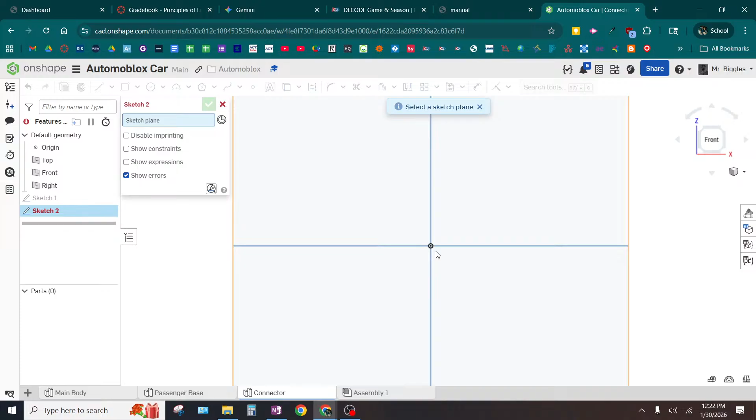So yesterday I was showing how to make the base of this, and I did it a variety of different ways. I'm going to do it one kind of quote-unquote final way. I'm going to do 3 center point rectangles. So that's kind of my middle one. And then I'm going to do a right side over here.

When I place the center of it, I'm going to have it aligned to the origin. Notice there's a horizontal constraint likely being applied. And I'm going to go in. I'm going to touch this. I'm not clicking, I'm touching it. And then as I go up, see how it's automatically constrained? I'm going to show that again. I'm placing the center here.

Notice as soon as I move my cursor there, you can see that orange dotted line connecting it, and the horizontal constraint is automatically being applied to lock it in line with the origin. But then when I do the second click, if I just immediately go up here, notice there's no snap to automatically apply a constraint to line this up with the rectangle. But if I touch this, I'm not clicking, I just touch it with my cursor and then go up, now there's a snap to constraint.

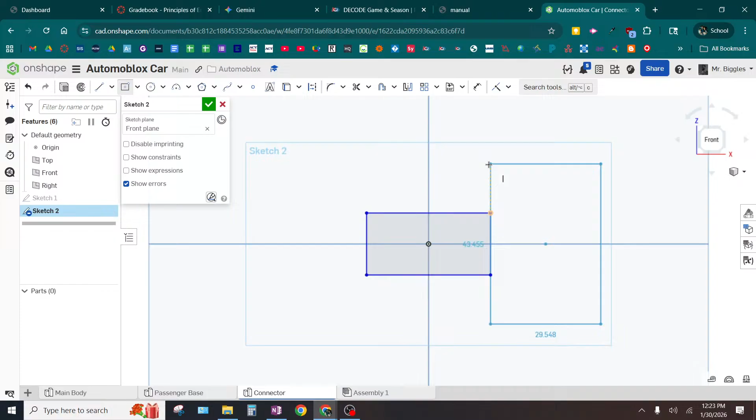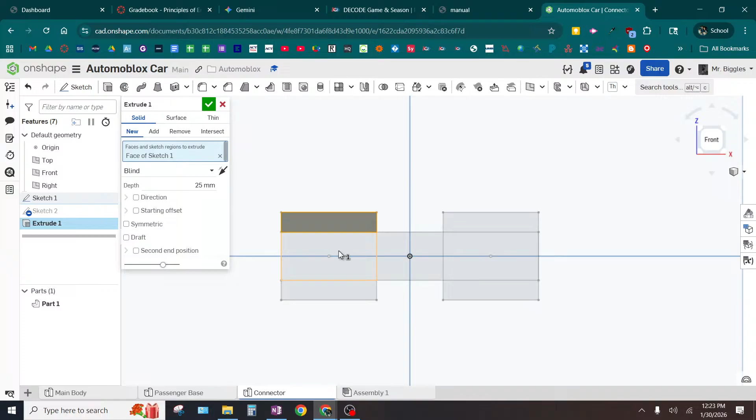Okay? Very, very useful. I'm going to do the same thing over here. Touch, then go up. Okay? What I like about this sketch as opposed to this one is that this one has things overlapping. So if I ever try to extrude with that sketch, I'd have to click on each of these individually, which is really, really annoying. Okay? That's kind of the downside of having that overlap.

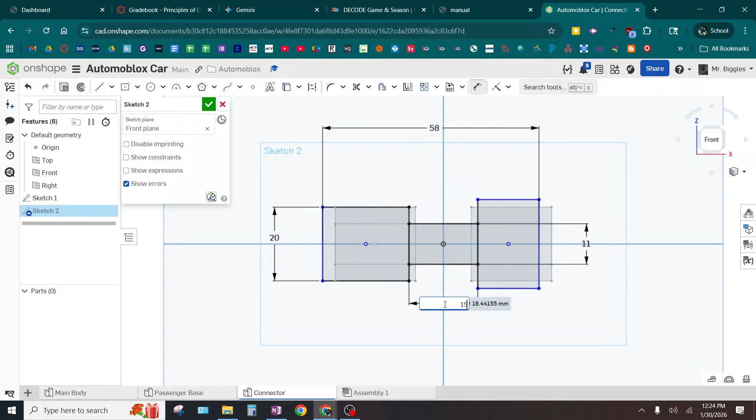On the other hand, 58, 20, 15, 11. Okay. On the other hand, these, I would only have to do 3 clicks instead of 5 because there's no overlap. Okay. I'm going to dimension this now. I believe we had 58, 20, 11, 15, and then I just got to do some equal constraints that I haven't done yet.

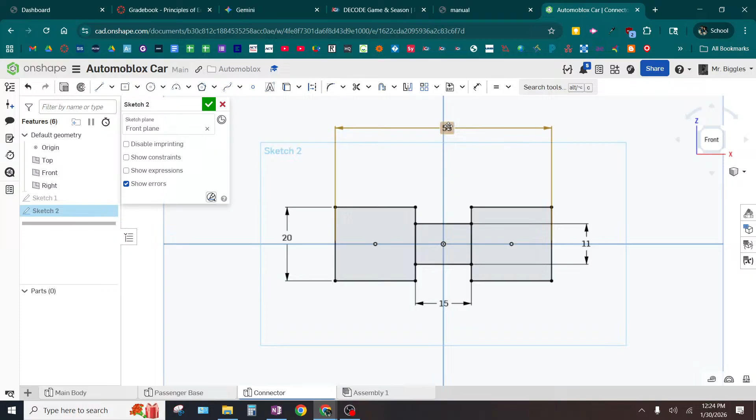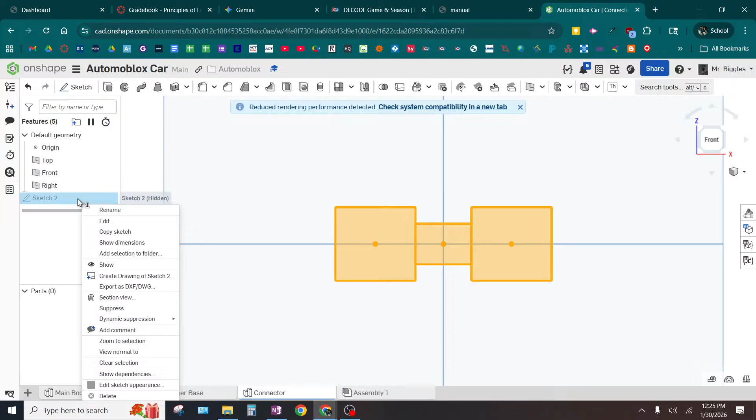So I'll make this equal to this one in size, height equal to this one, and it's all black. So this is, in my opinion, the best way to do it. I think it strikes a compromise between doing it with all lines and doing it with the rectangles the way I did before. You don't have overlap. You'll only have to do 3 clicks to select them. I think this is the best way to do it. So I'm going to actually delete my first sketch. And I'm going to rename this one the bottom section.

I am not done with it, but I kind of wanted to go over 3 different ways of making that same thing, pros and cons of each. You'll notice looking at it that there's rounded corners, fillets. We see those, yes? And if you look very astutely, the ones on the outside are larger than the ones on the inside. By outside, I'm referring to like this one. Does seem to be a little bit larger than the ones on the inside. By inside, I mean these. Okay? So I'm going to do 2 sets of 4 here.

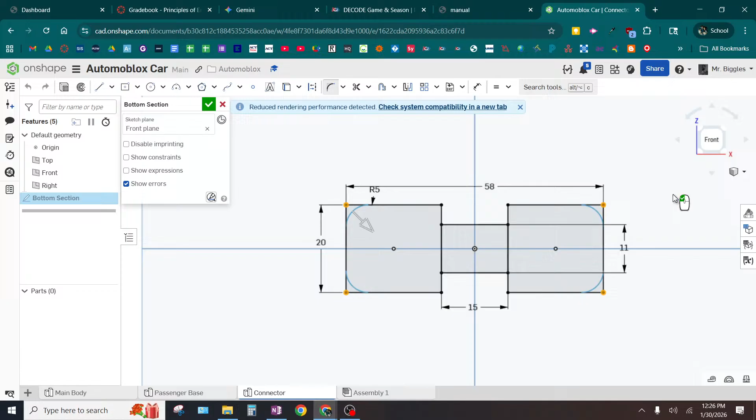Outer one. Maybe 5. Somewhere around 5 millimeters. So I'm going to do a fillet. Click. Click. Click. Click. I'm done clicking to select. I do one final click off to tell the computer that those are 5. Now you might notice, I'm going to undo that. Everything is black, which means it's fully constrained.

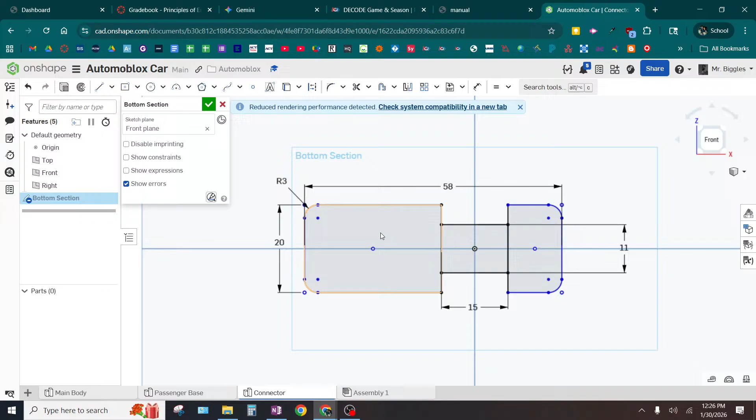But then the moment I add those fillets, now it suddenly is blue. It's almost like interfering with those corners. Yeah. Causes some issues. We see that? Yes? So you do. But I have found a lot of times that it is easier to do fillets as a feature than it is to do them in the sketch. However, that does introduce more things in your table of contents over here on the left side.

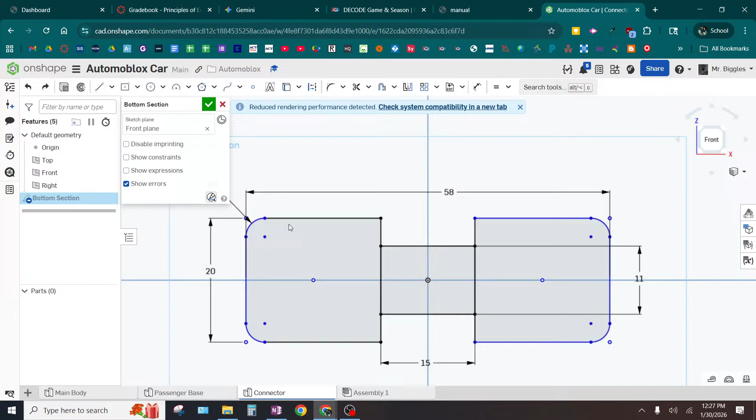One of the issues with sketch fillets is exactly what just happened here. You do equal constraints or dimensions, and it starts to break down after you apply the fillets.

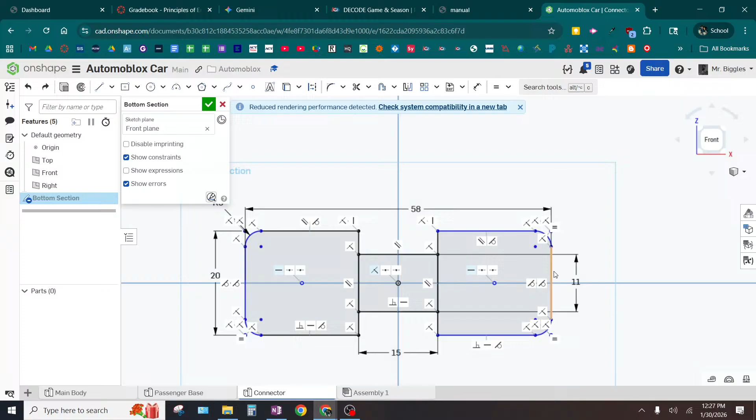You'll notice that my equal constraint is no longer there. I made this equal to this, and this equal to this. And that's because I equalized lines that no longer exist. They've been broken up by those fillets. So my recommendation is to not do the fillets in the sketch, but to do them as features.

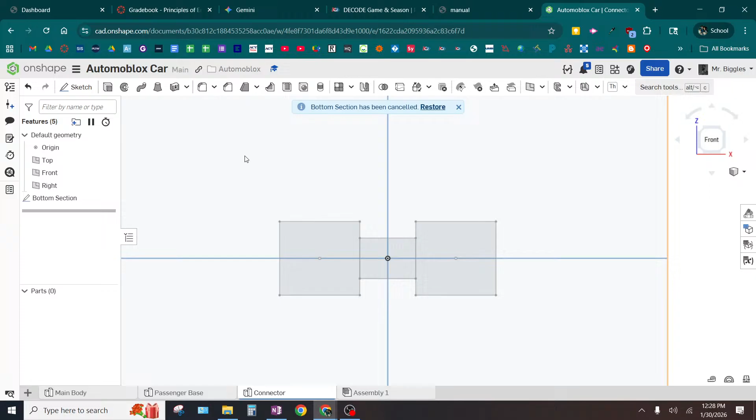If you do them in the sketch, and you can do that, you're just going to have to redo your constraints or dimensions to make it fully constrained, which is fully black. Okay, you've been warned. So I'm going to not do them in the sketch. All right. I'm going to extrude this and then apply the fillets as features. 3 clicks, that's not too bad.

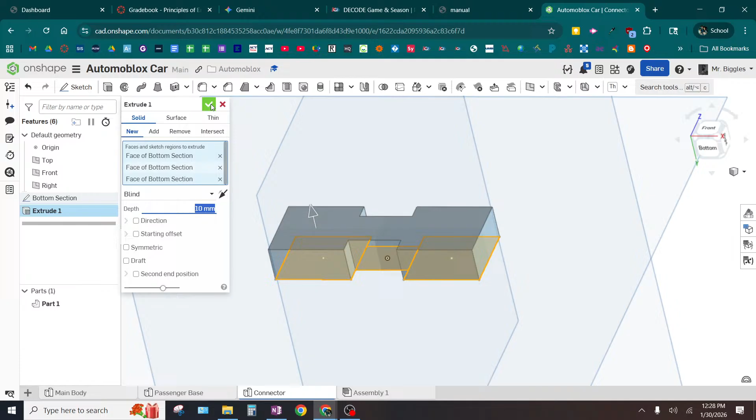How tall is this? You should be able to figure that out. That's not that hard of a measurement to make. Looks like it's a little bit more than 10. Doesn't quite round up to 11, so we go with 10. So this here is the bottom section.

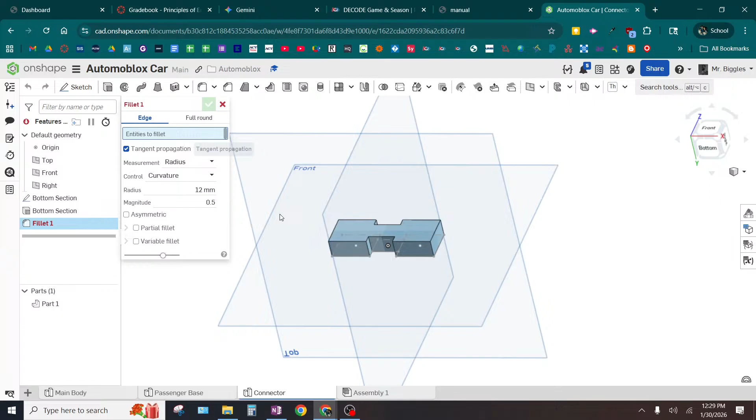And now, instead of doing fillets in a sketch, I'm going to do them as a feature. Okay? By doing them as a feature, what I'm effectively accomplishing is I'm making it more resilient. I don't have to worry about sketches getting kind of corrupted and constraints and dimensions falling apart. So I'm going to click on these 4 corners. Notice I'm clicking on a corner, so a line.

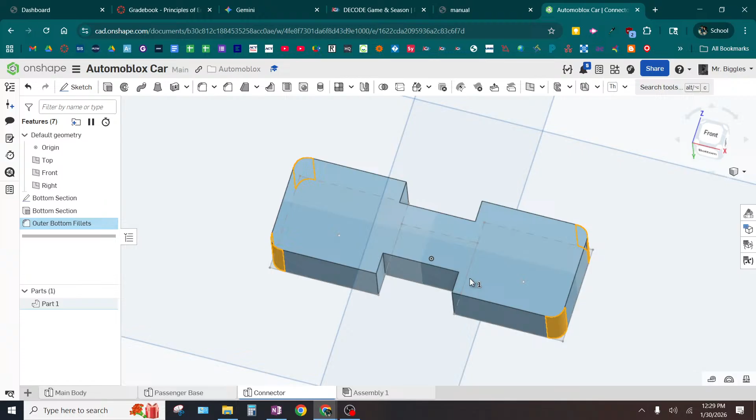And I'm going to change this to 3. And I'm done. Those 4, you can see them all highlighted orange. Those 4 were all a little bit larger than the 4 inner ones. So I got to do them separate because they're different sizes. So I'll rename these the outer bottom fillets. And then the next that I do, I'm going to call the inner bottom fillet.

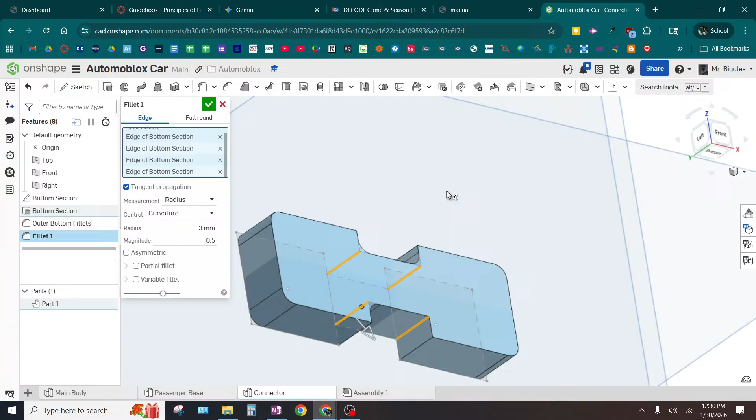So I'm going to click on the fillet thing again. And it looks like you click on this line here. 1, 2, 3, 4. Maybe those are only 2 millimeters. I don't know. They're smaller. 2, 1.5, something like that. And I'll call these the inner bottom fillets.

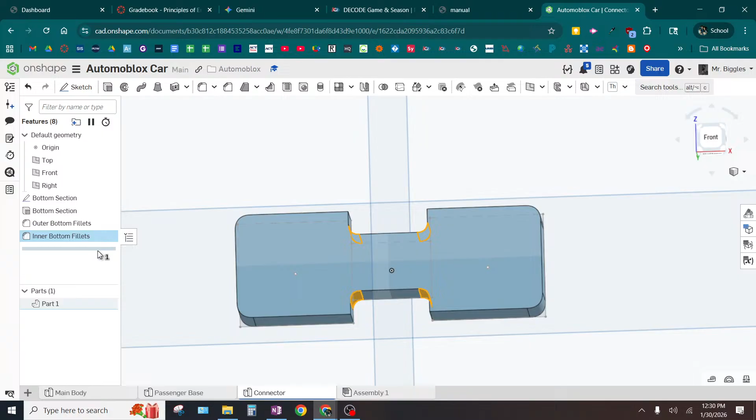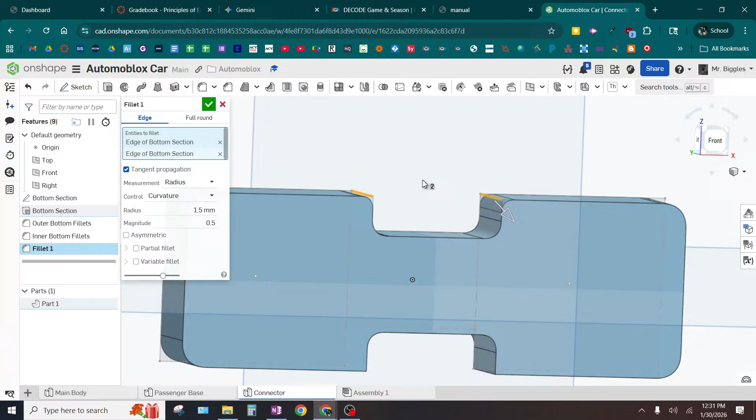Looking at the corners here, it does seem that these corners like this are a little bit rounded, like just a hair. So I'm going to fillet those. 1, 2, 3, 4. Maybe call those 1 millimeter.

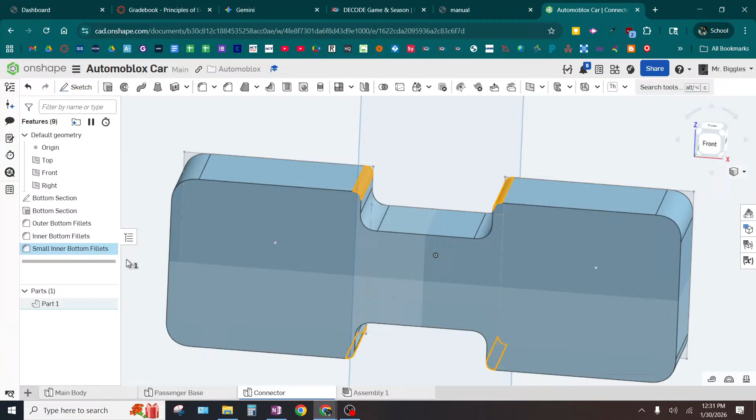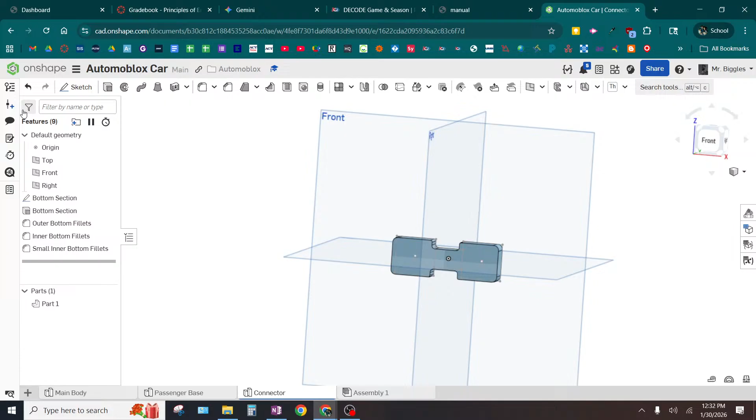And I have basically made my bottom part, like the base of my connector. Questions? All right. The next thing I got to do is I got to draw the upper half. So I'm going to make a sketch on this, and I'm going to draw the upper half on there. Okay? And it's a little bit smaller. A little bit smaller.

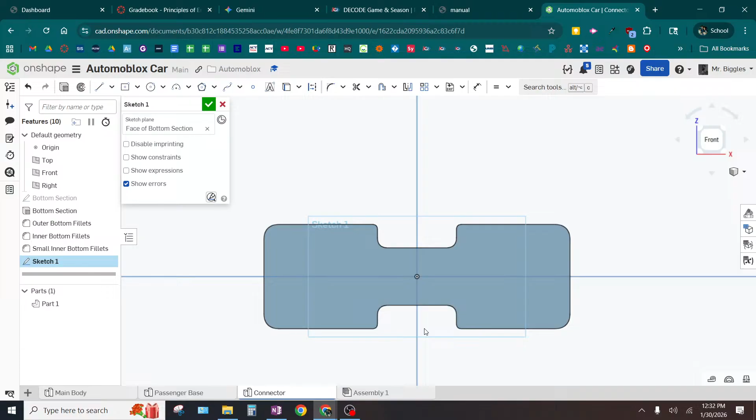So if you kind of look astutely in this area right here, you kind of see that inside there, those slopes, they're kind of angled, right? They're sloped. And if you look really carefully, it does seem to be flat here and this half, and then it starts to slope inward. So what we're going to do is we're going to start off with a very similar sketch.

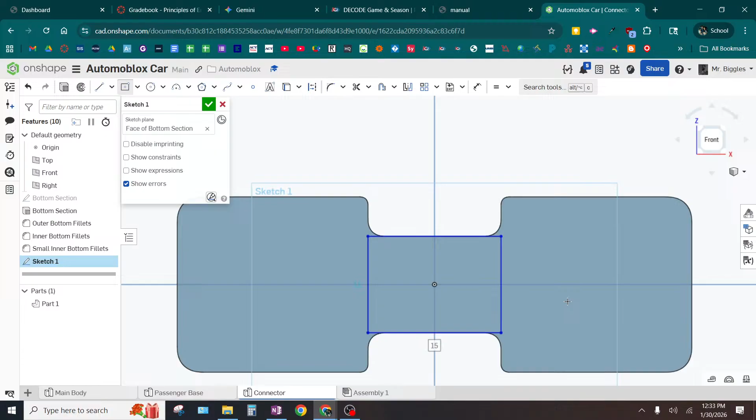There. So watch what I did there to get that lined up. Touch, go over. Notice that's aligning it with both of those points. See the double constraints, the horizontal and vertical being applied. Okay. So I can place that. Show that again. Click the center, origin, place it. Touch the line, then work your way over. You got to touch that line, stay on that line. If it doesn't work, you can go touch that.

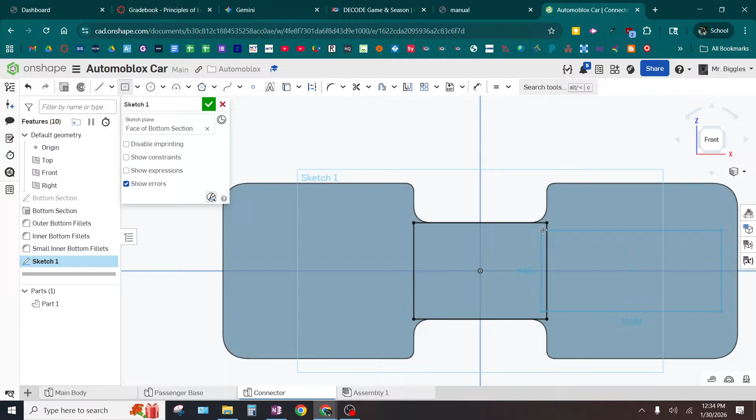So that's like the bottom of the upper section. And then I'm going to have a similar situation on this layer as I had the one below it. When you do these rectangles on the sides, be very careful. I do want to snap to it being aligned with this, but I don't want to accidentally force it to be at this point here or the midpoint of this line. Make sure you're not applying any constraint, but it being lined up with this. So be very, very careful.

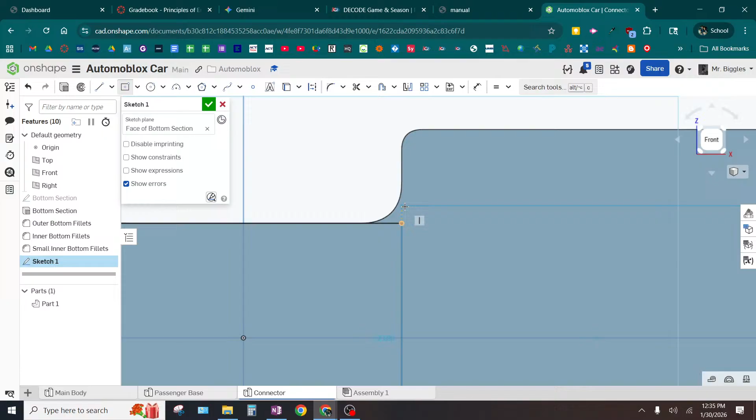Be very, very careful. Okay. So I'm actually just going barely above this point, which is not looking correct, but just trust. We can change the dimension later. I'm trying to avoid auto-constraining it to things I don't want auto-constrained. That's what I'm trying to avoid right here.

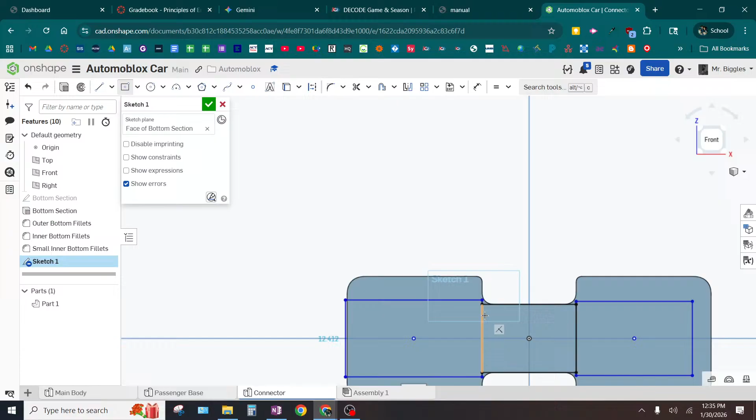So I started here. It's lined up with the origin. You can see that. And then I touch this line. I go up just a little bit, just so it's aligned with that. No other constraints applied. Okay? And I'll do the same thing on the other side. Touch. Go up just a little bit. And then I can dimension this. Looks like it's 20 by 17.